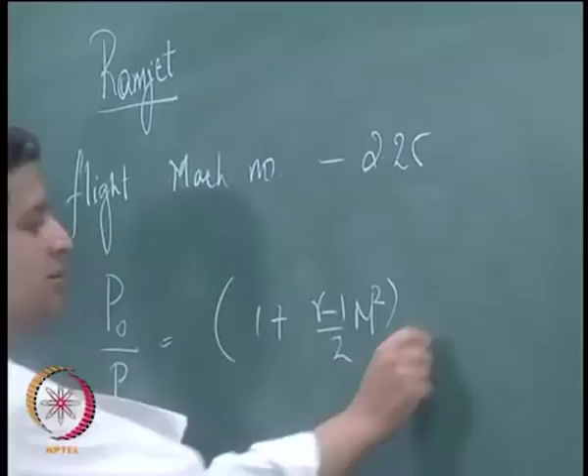If I have a flight Mach number of around 2.25, okay, then what is the stagnation pressure that you get? P naught by P, this ratio goes as 1 plus gamma minus 1 by 2 M square. If you do this calculation, you will find it is around 11.2, right.

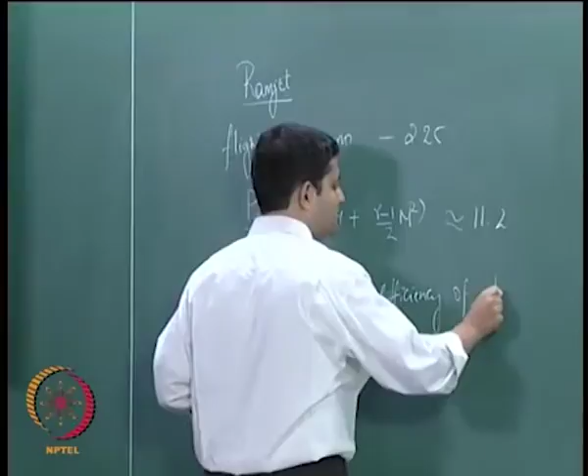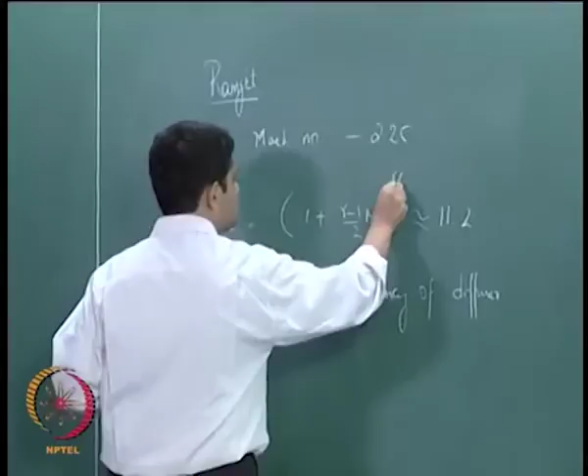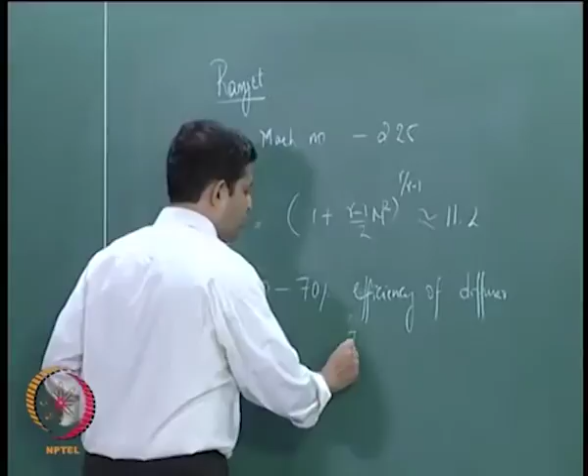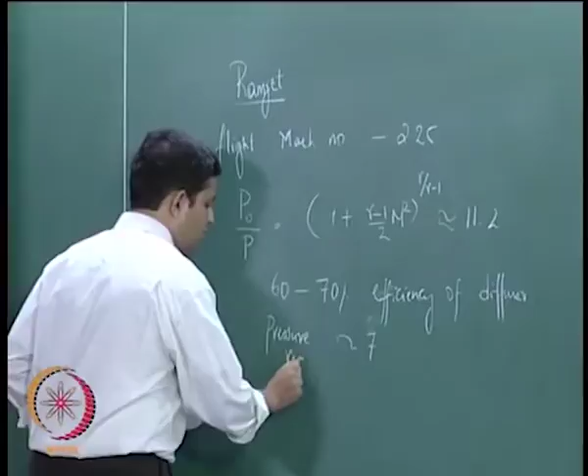If you remember when we discussed the turbojet and talked about efficiencies, we talked about diffuser efficiency, and we said diffuser efficiency is somewhere around 60 to 90%, and it depends on the flight Mach number. So even if you assume something like 60 to 70% efficiency of the diffuser, this number works out such that the actual pressure recovery from this stream works out to be something like around 7.

Now you have a fluid that is already compressed to something like 7 times the ambient pressure. So I do not need a compressor. And if I do not need a compressor, I do not need a turbine, so you do not have any moving parts, and that is the essential idea of a ramjet.

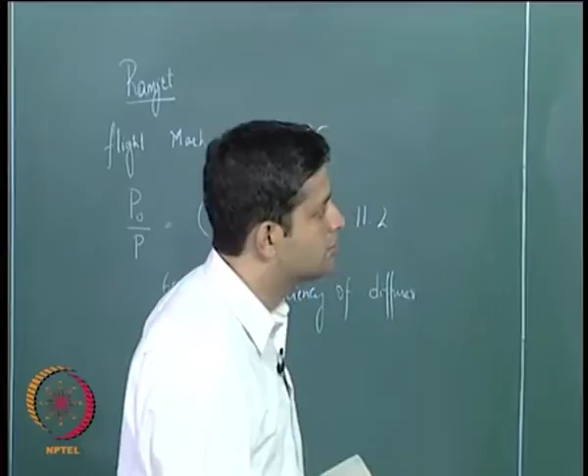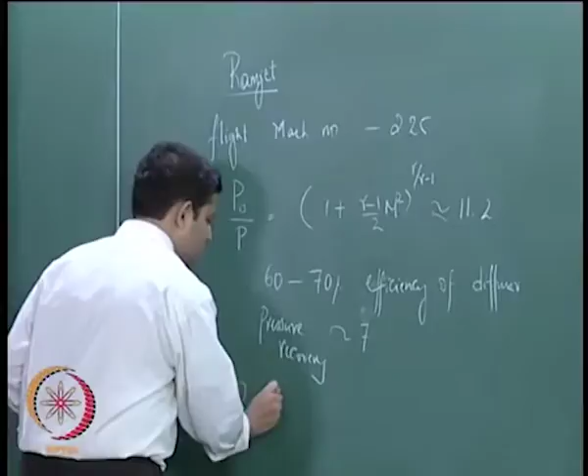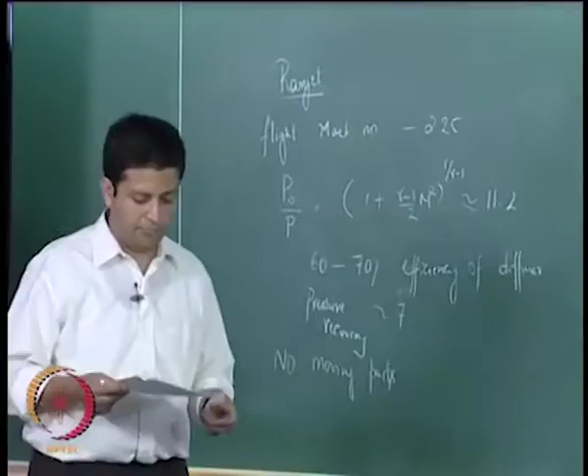And in that sense it is very simple to design. It operates very efficiently between a Mach number range of 2 to 4.

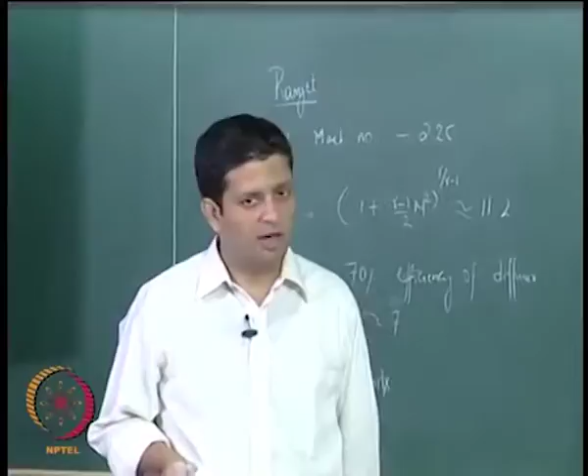Now what do you think, if you compare a ramjet with a turbojet, what would be the thrust to weight ratio of this compared to a turbojet? Higher or lower? It will be higher. So the thrust to weight would be something like 160 to 170 Newton per kg for a ramjet.

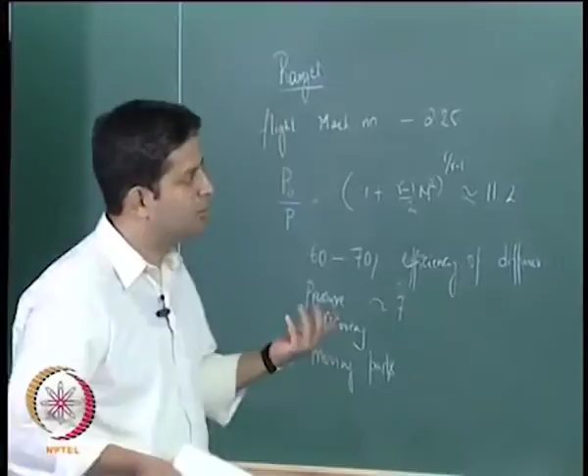Now, if you have a turbojet, the thrust to weight ratio would be something like 40 to 70 Newton per kg, and for a turbofan it would be lower than the turbojet. So the thrust to weight of a ramjet engine is the highest because it has no compressor, no turbine, there are very few parts, so it can be very light.

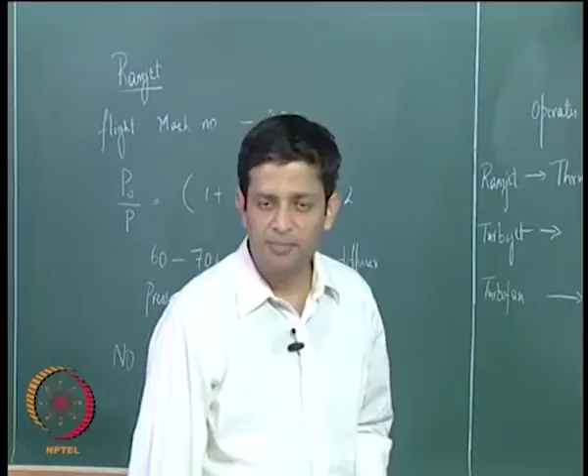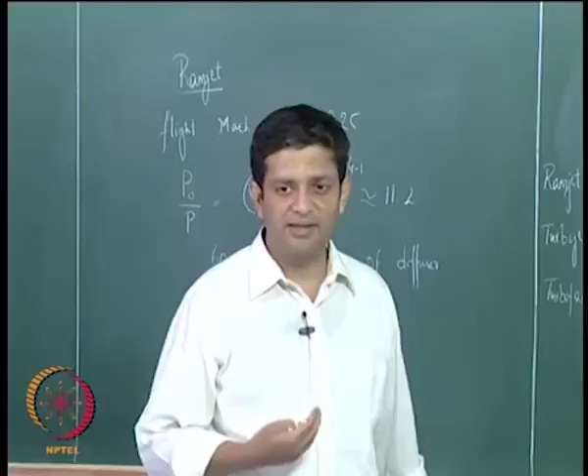What about SFC? What do you think would be the SFC of a ramjet compared to a turbojet? Would it be higher, lower, or same? Actually, if you look at a ramjet engine, it is very similar to the afterburner in a turbojet engine. What happens to the SFC in the afterburner, is it higher or lower than the main engine? In a turbojet engine, the SFC with the afterburner on is higher than without the afterburner on. So a ramjet engine is very similar to the afterburner of a turbojet engine.

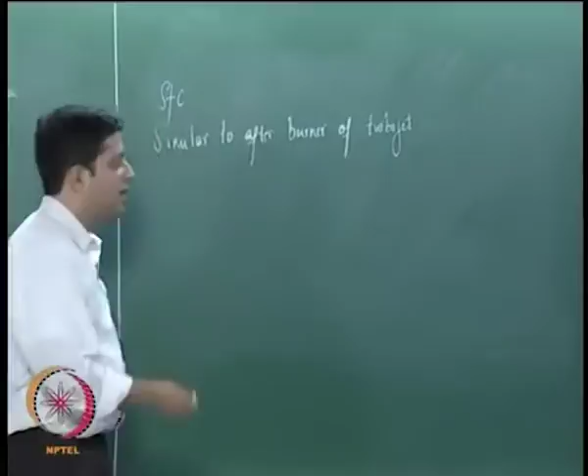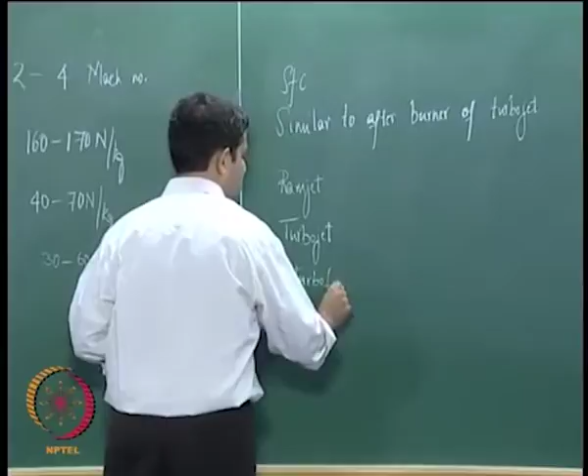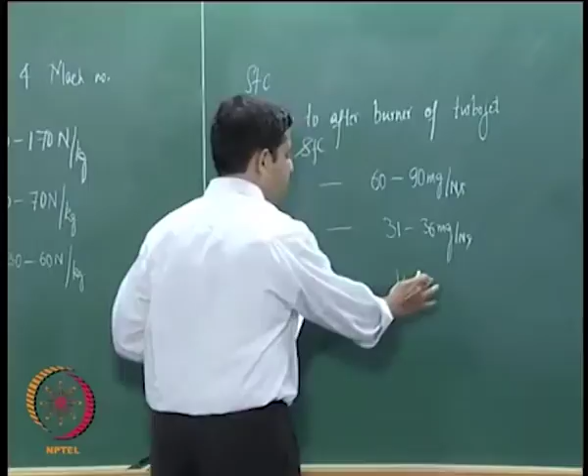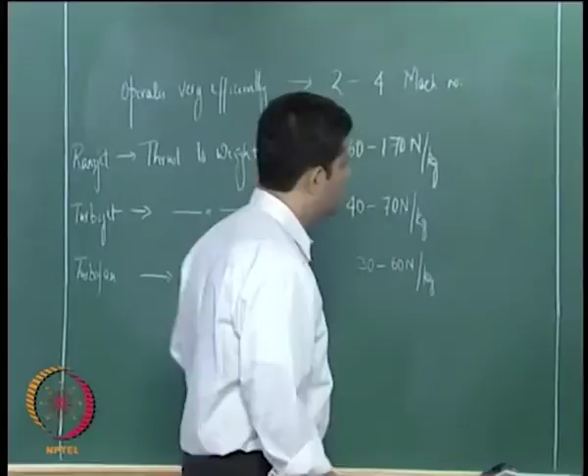Therefore, you will find the SFCs are much higher. So if you compare SFCs for ramjet, you will find ramjet SFCs to be 60 to 90 milligrams per Newton second. This was around 31 to 36 milligrams per Newton second, and 16 to 24 milligrams per Newton second. So you see that in the ramjet the SFCs are much higher.

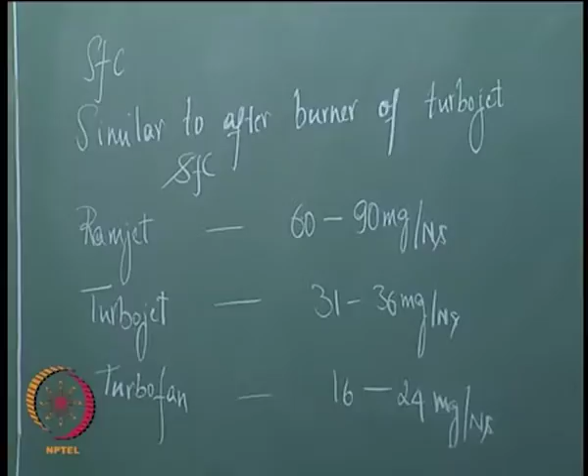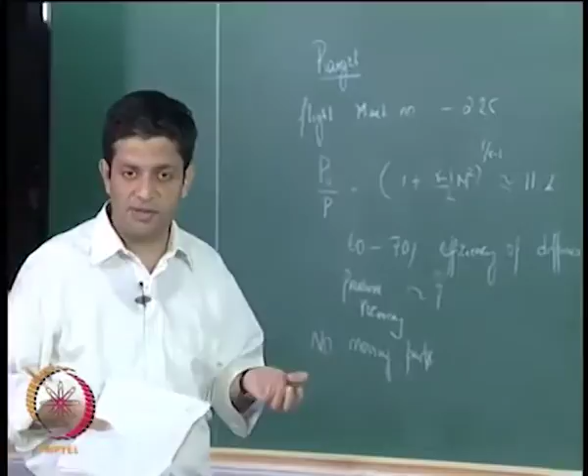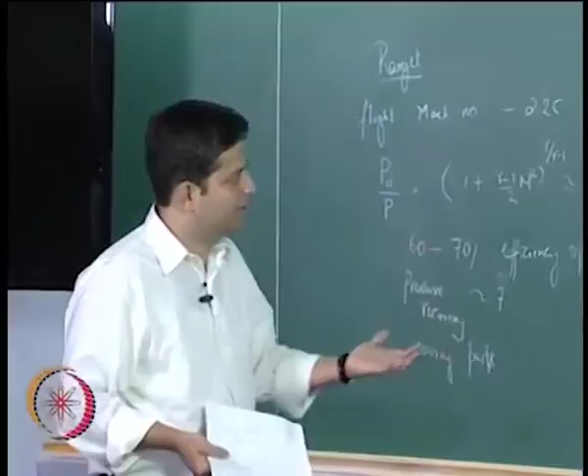The main reason for this is you are adding heat in a ramjet at a much lower pressure than what you do in a turbojet main engine, that is without the afterburner on. If you add heat in the main engine, you are adding it at a very high pressure, so the availability is more, and you can extract more work out of it. Remember, we always expand only for pressure. So if you add heat at a very high pressure, you can extract more work, so the availability is more. In a turbojet engine you are adding heat at a much higher pressure compared to a ramjet engine. Therefore, you will find the SFC of a turbojet engine being lower than that of a ramjet engine.

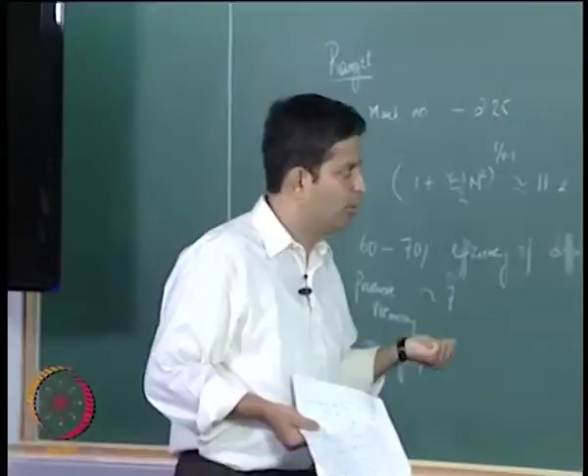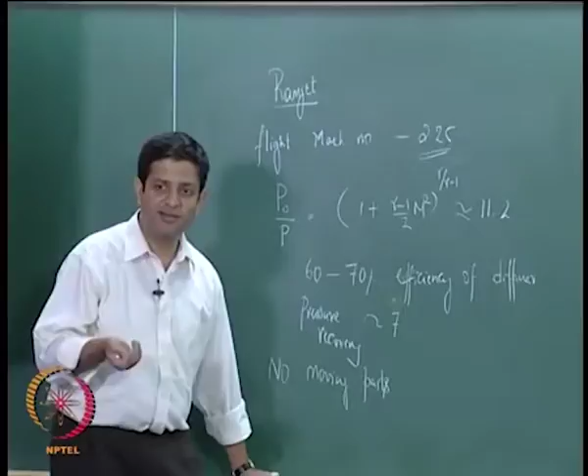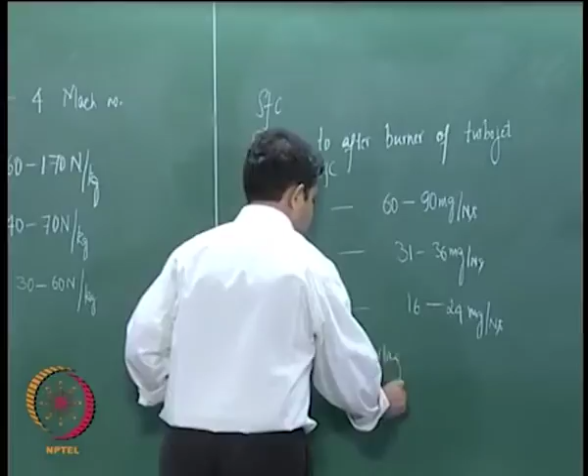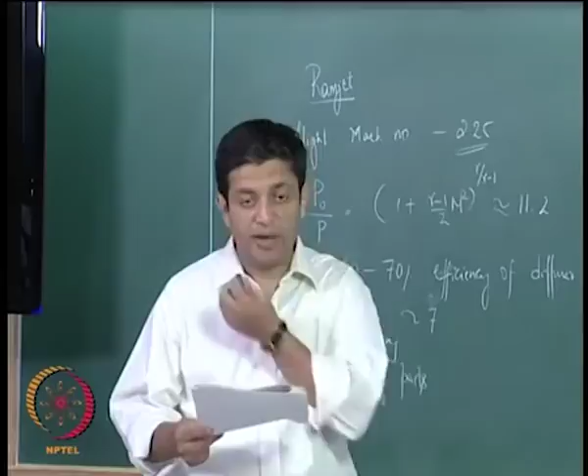One thing about the ramjet engine is that you somehow need to go to a high Mach number. If you do not go beyond the speed of sound, beyond Mach 1, then the compression will not be large. So it cannot be a self-starting system. You need something to take it from 0 to 2 Mach number or so, from where it can carry on further. Otherwise, it is not a self-starting system. That is one of the drawbacks, and usually rocket motors are used to take it from 0 to the design Mach number, and then these things operate at that particular Mach number.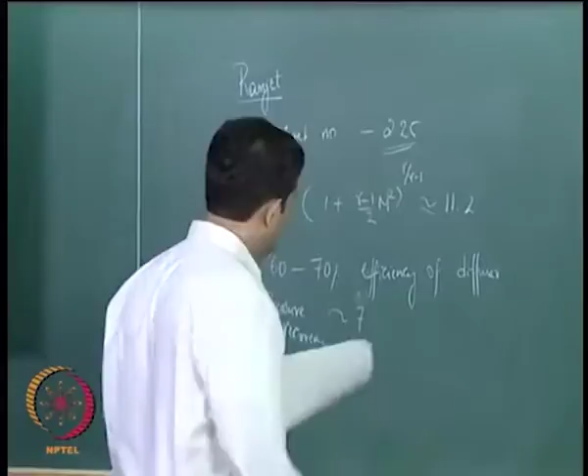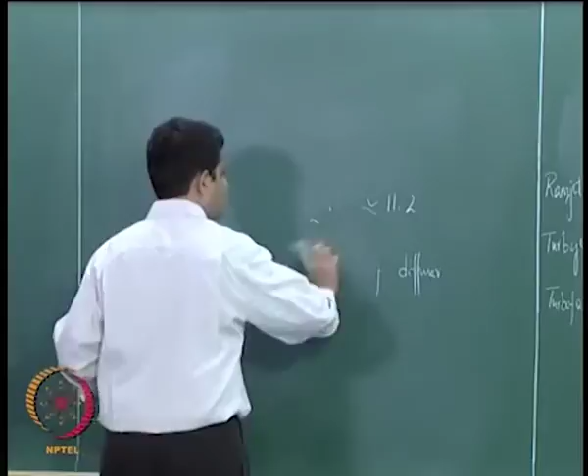Now, what are the applications of a ramjet? These are typically used in missiles, and in the Indian scenario, you have Akash and BrahMos that are ramjets.

There is also a very famous aircraft that used a ramjet, the SR-71. It was a unique design, a turbojet and a ramjet put together. That is the only aircraft that did that, and it had a very high Mach number because it used that ramjet. It could bypass and operate in different Mach number regimes differently: at high Mach numbers it operated as a ramjet, at lower Mach numbers differently. So SR-71 was the only aircraft that has used this, otherwise it is primarily used only in missiles.

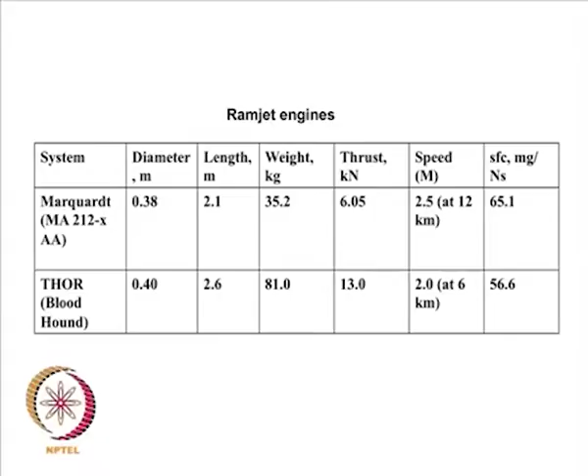In a sense, from the piston engine plus propeller, which was flying at very low speeds, we have come to a ramjet, which can take us to something like Mach 4. Why not beyond it? What is the trouble beyond it? Why can't we go beyond Mach 4 with a ramjet? Drag, okay, any other reason?

A ramjet works on the principle of bringing the air onto near-stagnant condition. So if the Mach number is higher, the stagnation temperature will be much higher.

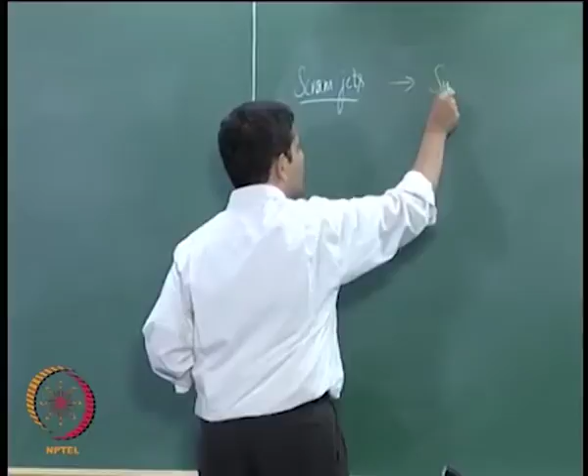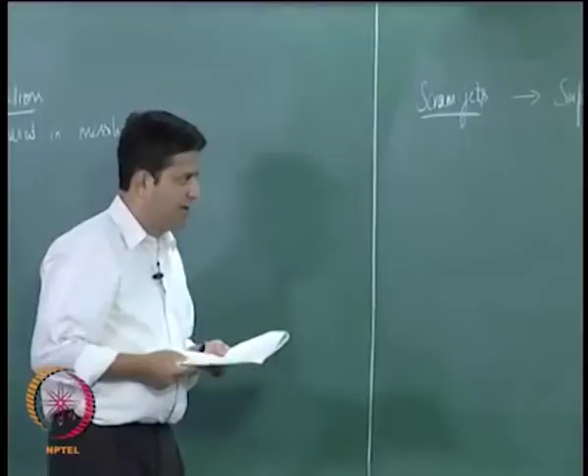Now, if you take a look at a ramjet, the flow Mach number, as you rightly said, is brought down from ambient condition to low subsonic inside the combustion chamber. If you take a look at that, in contrast to supersonic combustion.

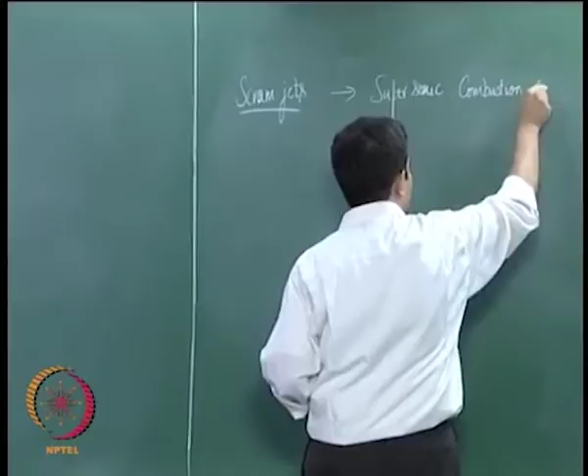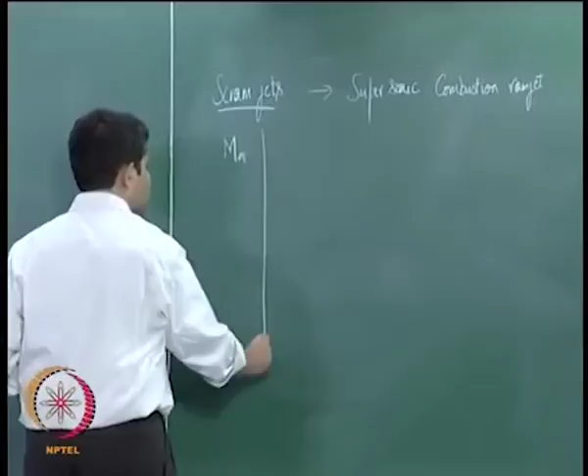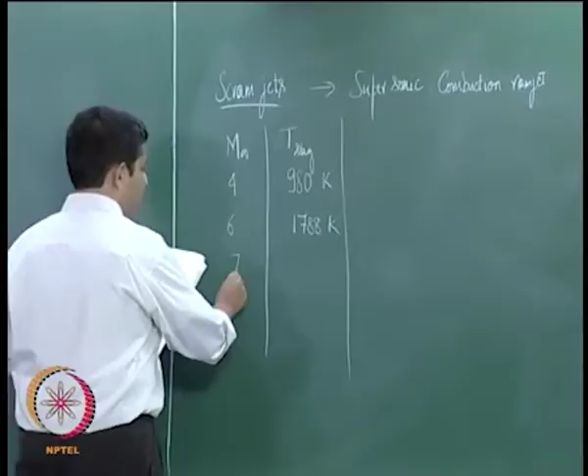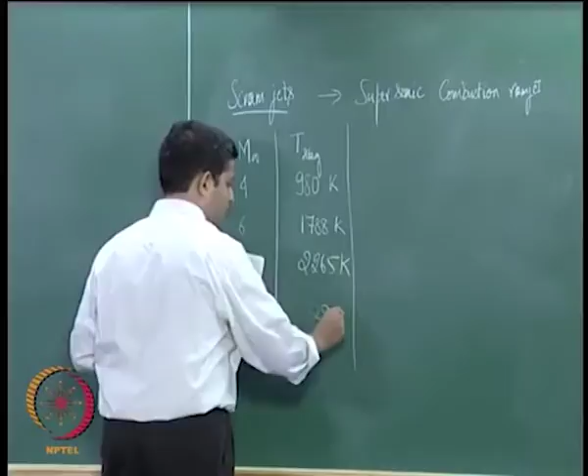Now, if we were to do the calculation of what is the temperature at the end of this compression process, for different entry Mach numbers, which I will denote as M infinity, and calculate the stagnation temperature T, we will find that at a Mach number of 4, the stagnation temperature is somewhere around 980 Kelvin. At Mach 6, it goes to 1788 Kelvin, and at Mach 7, it goes to 2865 Kelvin.

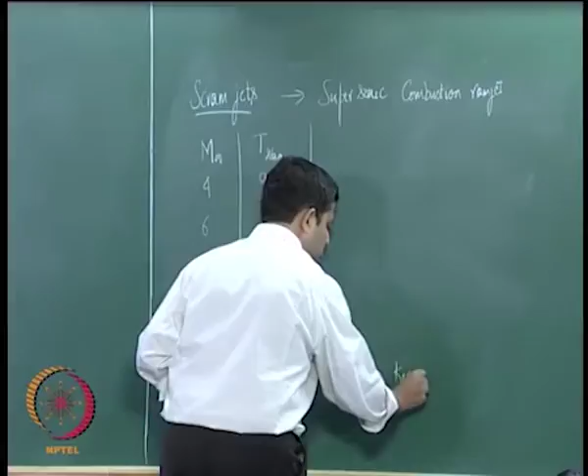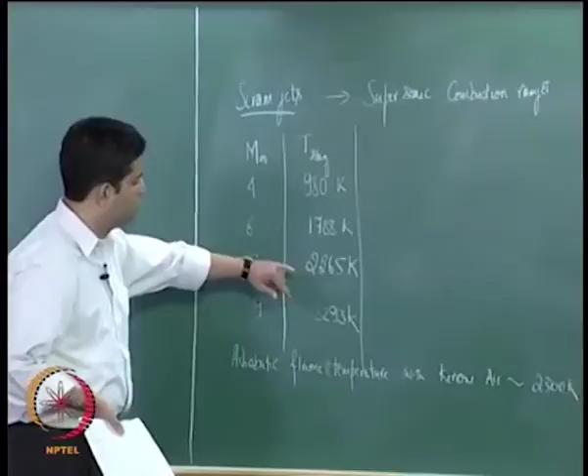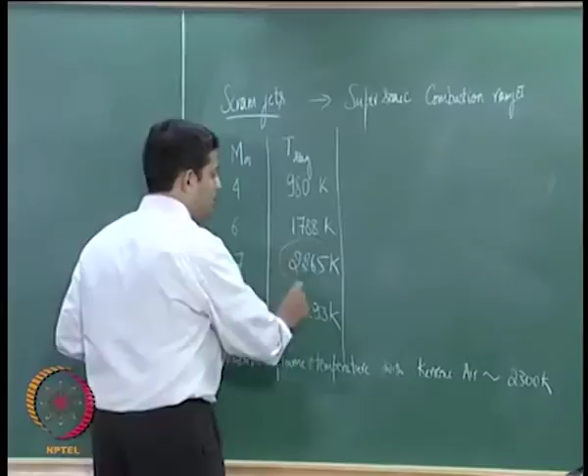Now, the trouble is, if you are using kerosene as the fuel, if we remember our previous discussions, the adiabatic flame temperature that you can get with kerosene air combination is somewhere around 2300 Kelvin. Now, if you look at this table, you have T stagnation itself going to something like 2260 at a Mach number of 7. So what it tells you is beyond this point it will be very difficult to add any sensible heat to the flow by burning a fuel, which is why I asked you the earlier question.

Suppose I do not add heat, what will happen? You will not get any thrust even here. So you need to add heat, and to be able to add heat you need to ensure that the temperatures do not go to such high values. And what you do in a ramjet combustion is you bring down the velocities to nearly subsonic conditions at the entry of the combustion chamber. Now the idea is, if you do not do that, if you let the flow velocities be supersonic even at the entry of the combustion chamber, then the temperatures will not be so large, and therefore you will be able to add heat, and that is the idea of a supersonic ramjet.

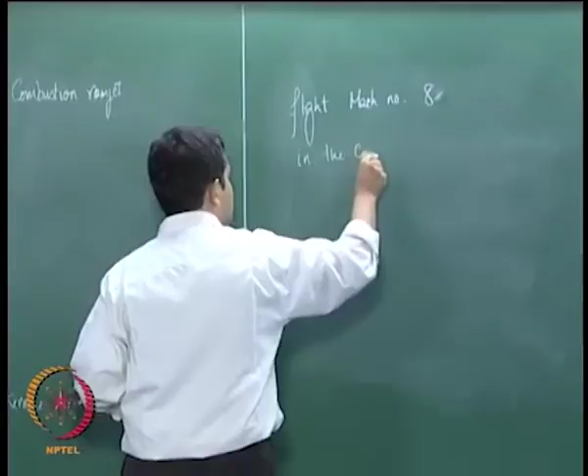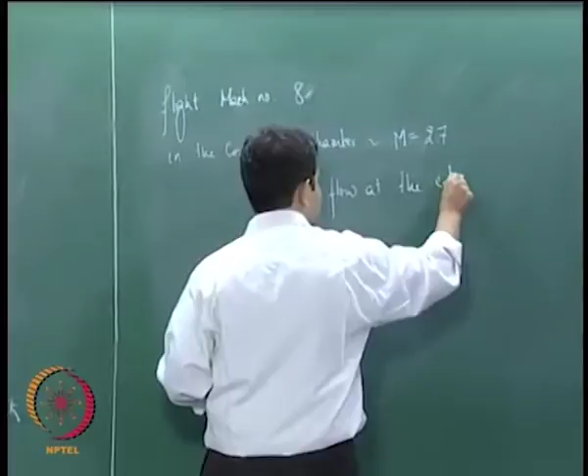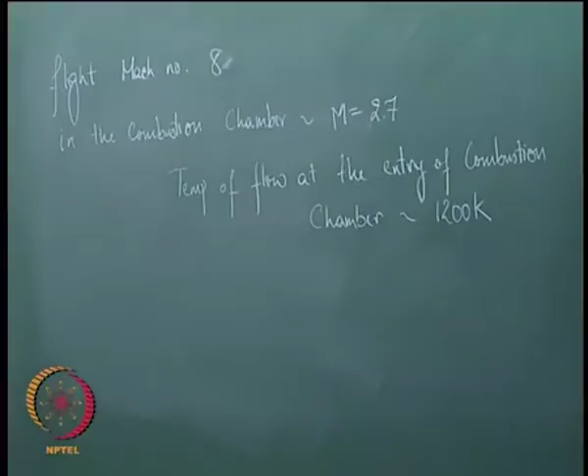So let us say you have a flight Mach number of around 8, then in the combustion chamber if you can allow a Mach number of around 2.7, then the temperature of flow at the entry point of the combustion chamber will be something like 1200 Kelvin. Now surely this is a harsh temperature, but it is still not very large. So there is scope for adding some more sensible heat by burning a fuel, and then you can expand the flow through a nozzle.

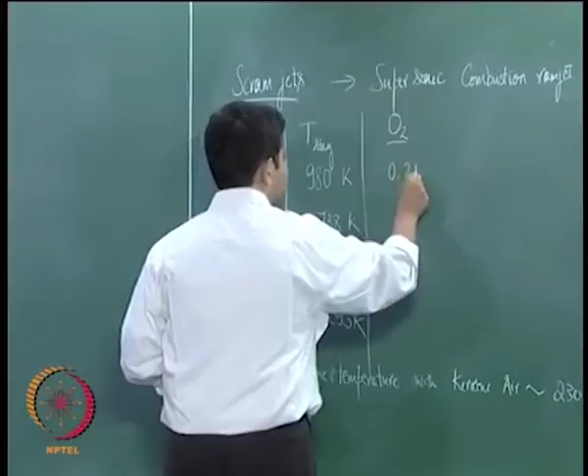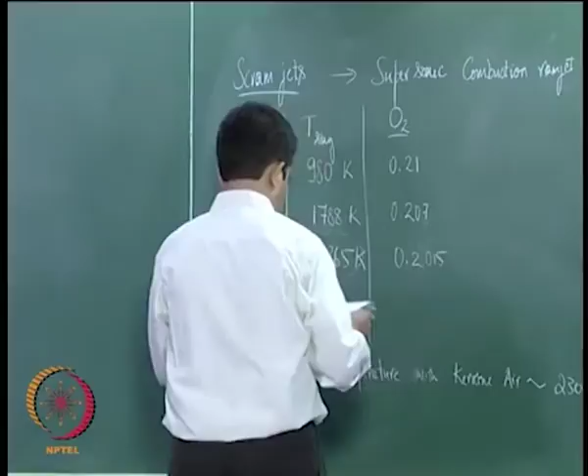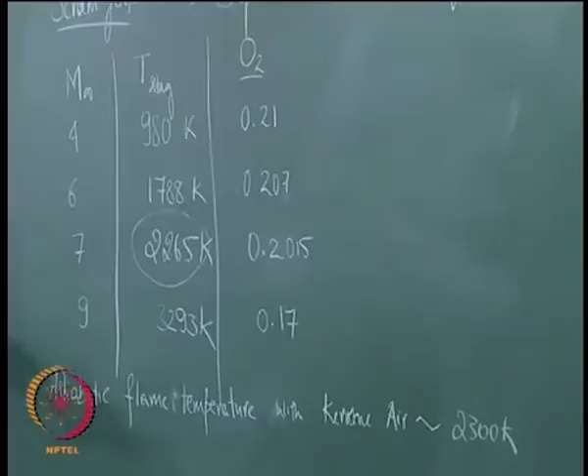There is also another problem that I did not talk about here, that is once you go to such high temperatures, the oxygen and the nitrogen in air start to react, and the oxygen content in the air slowly begins to deplete. You will not have the same amount of oxygen content if you bring the flow from somewhere around Mach number 7 to around stagnation conditions. So if you take a look at those numbers of the oxygen in the air, it ranges from something like 0.21, and the oxygen content you see is decreasing.

So because of these two problems we have looked at what is known as a scramjet. Now scramjet, it is easier said. Let us say we can bring down the Mach number from 8 to 2.7 and then do the combustion at 2.7 Mach number. It is very easy to say this, but very difficult to do. The idea of a scramjet has been there for a very long time, more than 30 years now, and yet no country has ever flown anything with a scramjet. The Americans have recently tested something, the Australians have recently tested something, the Japanese have a program, Indians have a program, but Indians have only tested it without fuel addition. ISRO has tested it very recently without any fuel addition, only aerodynamic testing. The Americans have tested it with fuel addition, and they claim to have produced positive thrust.

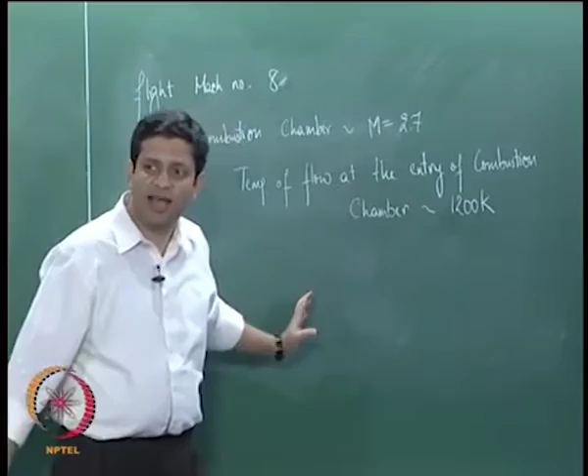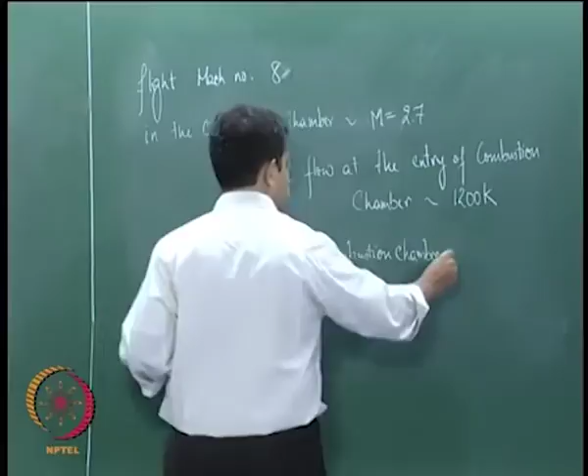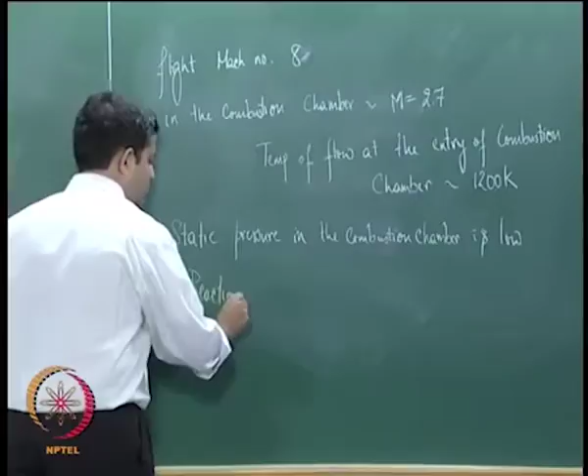We will see why it has taken us this long from the concept to realization stage. What are all the difficulties involved with scramjet? Why is it taking us this long from concept to realization? The first problem is, if you look at this Mach number here, you are not bringing down to stagnation conditions. So therefore the static pressure in the combustion chamber will be low. Because of this, now reaction rate between fuel and oxidizer depends on this static pressure. It goes as reaction rate goes as square of the pressure typically. Now if the static pressure is lower, then the reaction rates will not be faster. The reaction between fuel and oxidizer is not happening at a much more rapid rate than you want it to be. So reaction rates are very low.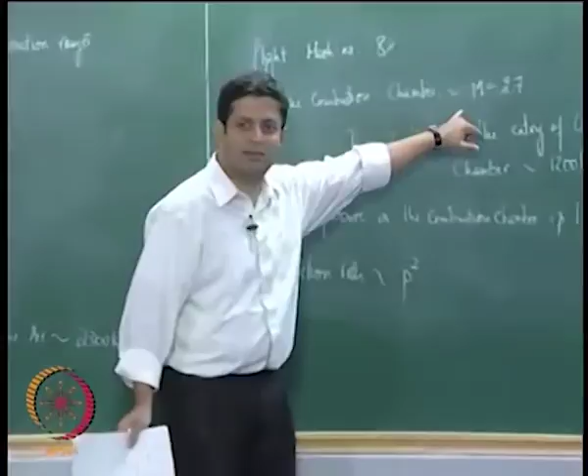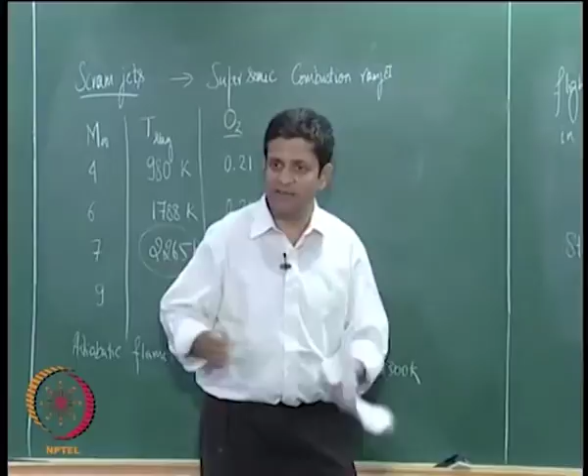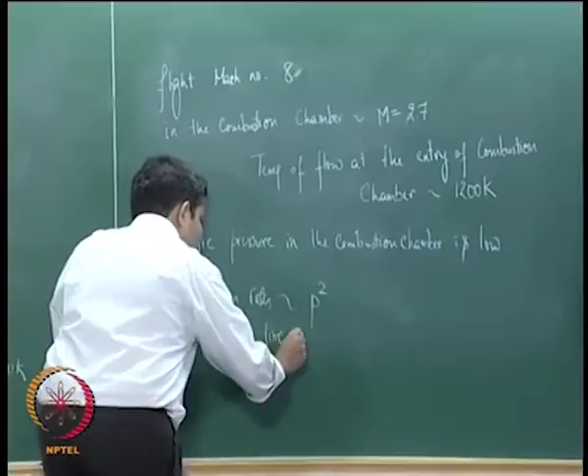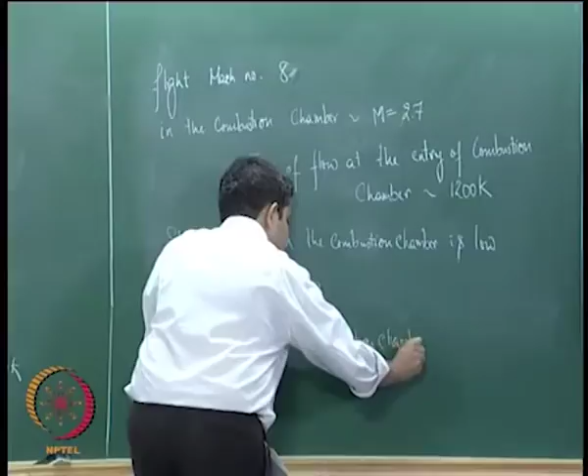Now there is an additional problem. You are saying let us somehow bring this Mach number to something like 2.7. Typically, in gas turbine engines as well as in ramjet engines, this Mach number would be 0.3. From 0.3 to nearly 10 times, that is the Mach number that you are looking at. So the flow speed is very large through the combustion chamber. Flow speeds being large means what? If you have a particular length of the combustion chamber, then the residence time of the reactants is very small. So this is like a double whammy. Firstly, you have reaction rate slower, and on top of it, residence time is going to be small. So it is like a no-win situation that we are getting into. That is part of the reason why it has been so difficult realizing this.

The other part is, if you look at typical gas turbine engines used for aircraft, Boeing or Airbus makes the airframe, and Pratt and Whitney or GE makes the engines. So the expertise of engine making and airframe making are not in the same place, they can be distributed. You can make the aircraft and then match the power and fit an engine, with regard to any other aircraft. We are making the airframe for the LCA, and we are using a GE engine right now to power it. So airframe development can take place separately and the engine development can take place separately.

This is because there is no great aerodynamic coupling between the two. The aerodynamic coupling between the structure and the engine is not too large in most systems, but in this case there is a very strong coupling between the airframe and the engine. So you can't develop them separately, you have to do them together, and that is one of the major drawbacks.

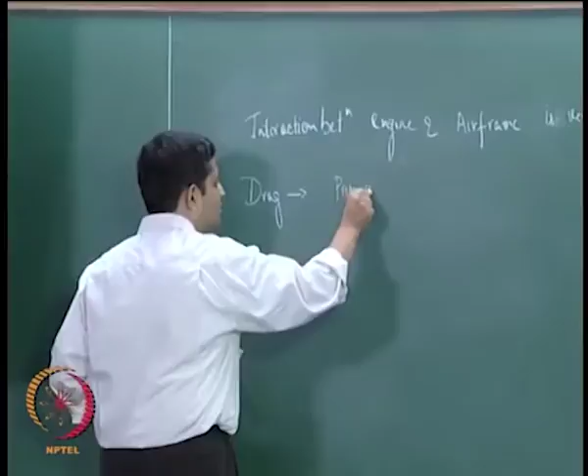The other major problem here is drag. Both the pressure drag and the viscous drag are high here, because you are going at very high Mach numbers. Now, you want inside the engine a Mach number of 2.7. If you want that and want to ensure a reasonable residence time, then the length of the vehicle will have to be long, which means the drag will also be large.

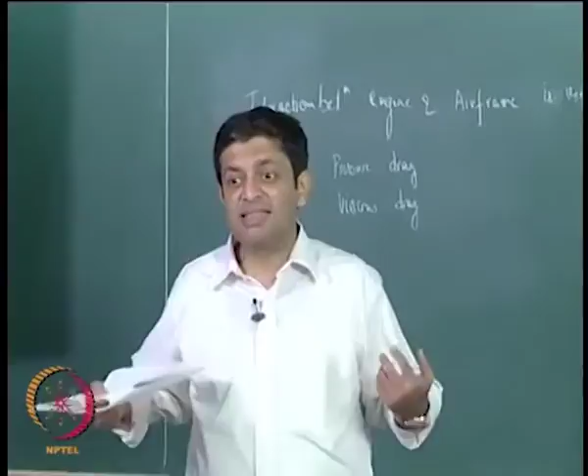So in most engine flight tests, unless people come up with realistic numbers, it is very difficult to believe whether the system produced any positive thrust or not. Please also remember that even on the inside there is viscous drag, because the flow Mach numbers inside the engine are also very large, and typically the engine length is comparable to the entire vehicle length in this case. So drag is a serious problem here, very large drag.

And lastly, testing this is very difficult, because you need to test for the engine as well as the structure. If you are to build a wind tunnel for testing this, it is very expensive, because as you go to higher and higher Mach numbers, the power required to keep it running for even a small time is very large. So testing is a problem.

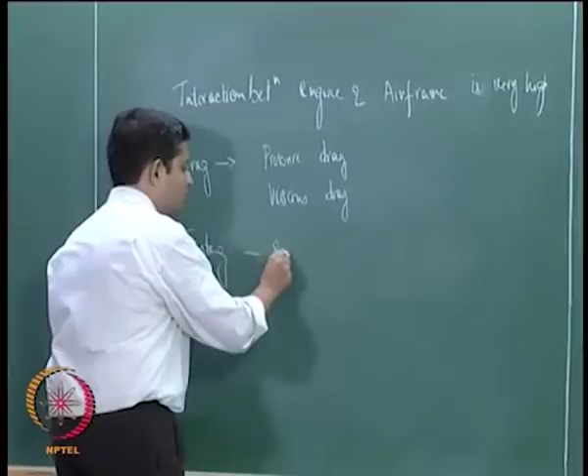You can test only at small scale. But the other problem is how good is your scalability, that is, if you test something at small scale, can you go ahead and use it at a larger scale and be confident that whatever you have done at a smaller scale is going to be valid. It is not going to be easy if you have a circular intake, which is why people go in for a rectangular intake, because you can add them up. If you have one rectangular intake and do the testing on that, then you can make a large engine by simply adding up all these rectangular intakes. That is one way people have looked to address this problem.

So you can have a rectangular cross section, so that you have modularity of design.

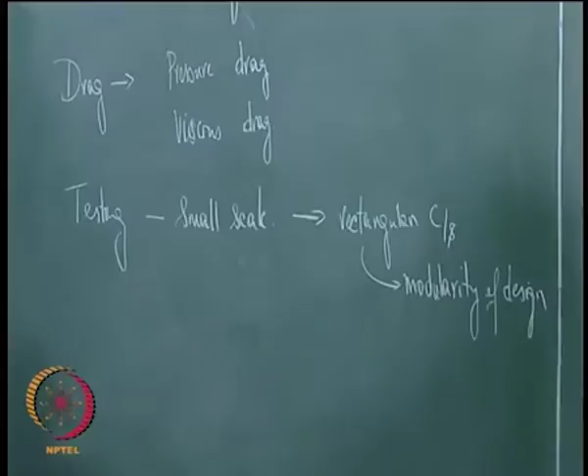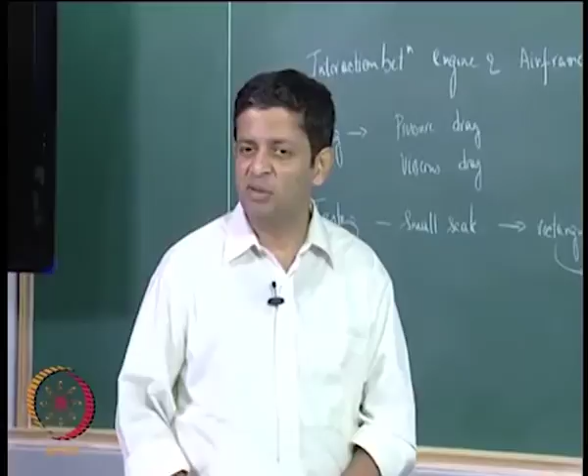Why are we interested in this? We simply seem to be putting too many problems here. We are only stating problems, and the way it has been stated makes one feel there is no hope. It is also true that people in the field say it is not very easy to get an accelerating system in a ramjet or scramjet. Probably at a certain Mach number it can sustain itself, that is, just overcome the drag.

Why do you think people are looking at this? What is the motivation? Just flying faster is not sufficient, no? The kind of money being invested in this activity is very, very large, so there must be some other reason why people are doing this. Outer orbit - you can't go beyond the atmosphere with this.

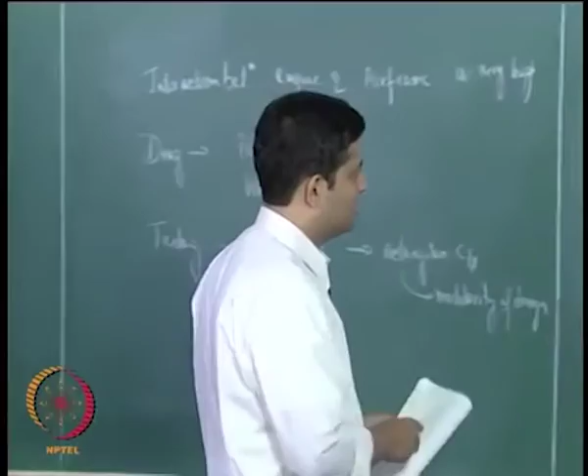No? Okay. If you look, there are always two applications, or in this case three applications. If you look at a launch vehicle application - because in India both ISRO and DRDO are pursuing separate programs, and there must be a reason why they are pursuing it - if you are using this to launch something into orbit...

Typically current launch vehicles use rockets to do this. We will come to what rockets are a little later in the course, but just for this argument, rockets have to carry their own fuel and oxidizer on board, which means the weight of the system goes up. As compared to that, air breathing engines use atmospheric oxygen, which is usually a few times larger than the fuel required. So they end up using atmospheric oxygen and only carry fuel on board.

Now with a ramjet we have a limitation of around Mach 4, that is the limit we can go up to right now. But if you go for this, you can reach a larger Mach number inside the atmosphere, and if you can develop this successfully, the cost of launching any satellite would be much smaller if a large portion of it is air breathing. That is the idea why ISRO is pursuing it.

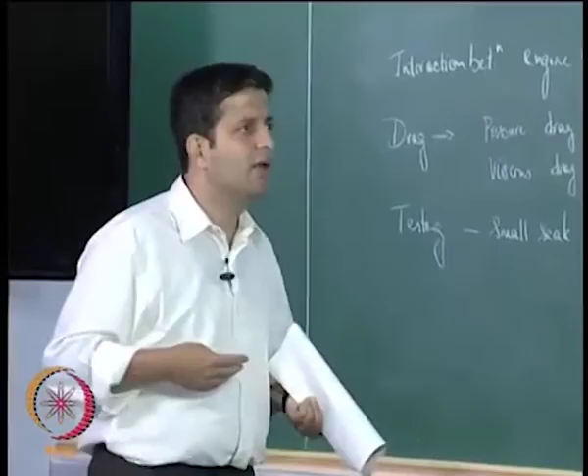Now if you look at a military application, why do you think a military would be interested in this? If you have a missile built around a scramjet, and if it can go at Mach 8, it is very, very difficult to track and shoot it down. You might argue that we already have ballistic missiles which also go at very high Mach numbers, but there is a difference.

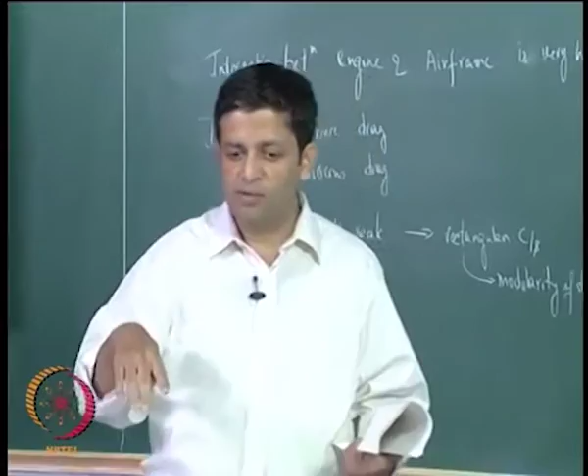A ballistic missile is powered only for a part of its flight, the remaining part it is going as a stone. It can maneuver depending on the aerodynamics, but it is not powered during the entire flight period, only during a portion of it. But with this, it is powered through the entire period it is flying, so your maneuverability is very high, not only are your speeds high. This makes it very difficult for the enemy to shoot it down, and that is the reason why the military is going ahead with this.

And if you look at any civilian application - typically with current day technology, the San Francisco to Tokyo flight takes something like 14 hours. People say that if you have this kind of scramjet engine, then you can do this within 2 hours. Wouldn't it be nice if you could fly between any two far places within just 2 hours? That is the motivation behind looking at this from a civilian perspective.

Although the civilian perspective is very far away right now, people are looking only at the military and launch vehicle applications. Most innovations, especially related to aircraft and the aerospace industry, always go through this cycle: firstly the military puts it to use or develops the technology, then the civilian application comes in.